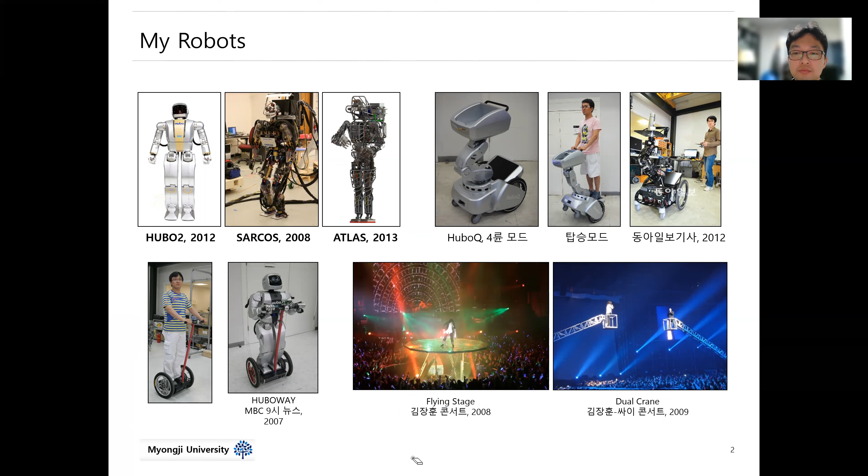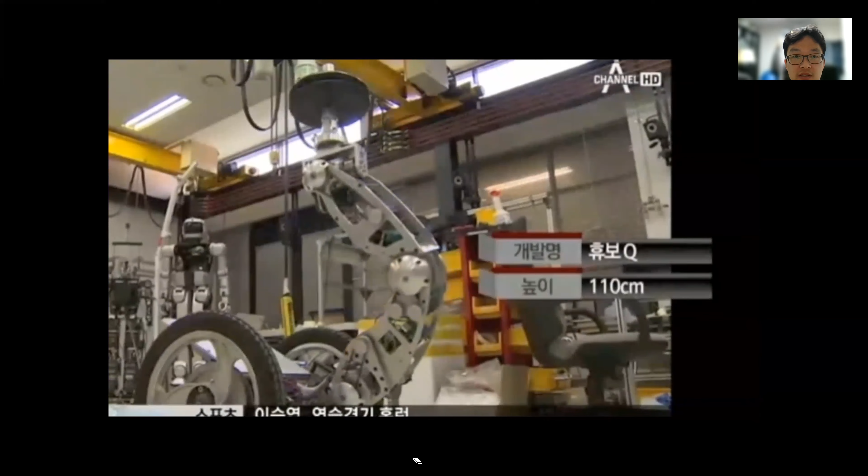This one is from a TV news segment, where my robot was shown. As you can see, it has high speed ability and can deliver very sophisticated objects. The middle manipulator controls to balance the object at the top position.

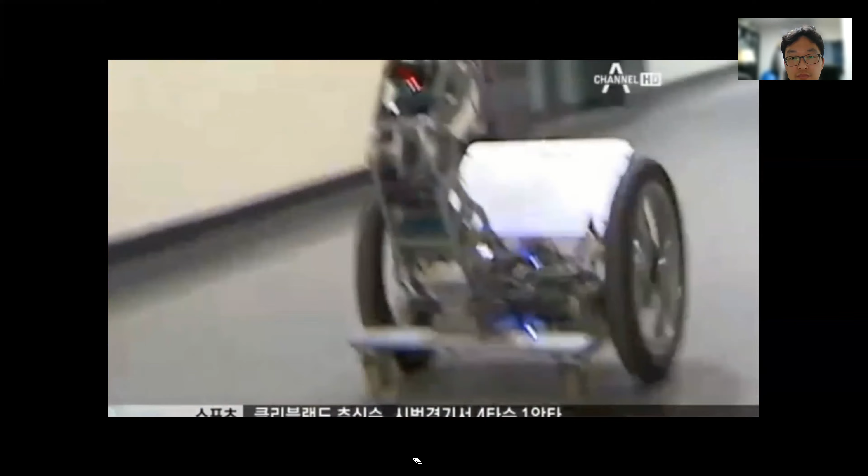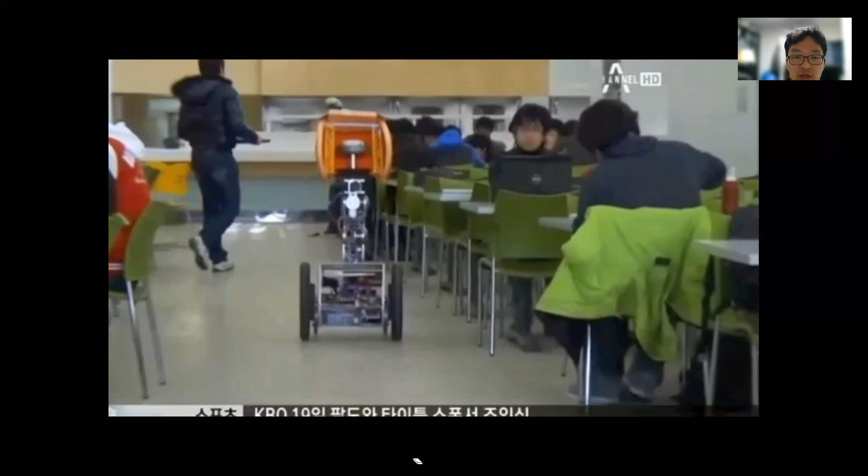This is myself about 10 years ago. This robot is transformable, so it can move in 4-wheel mode, and also transform into 2-wheel mode, and balance itself.

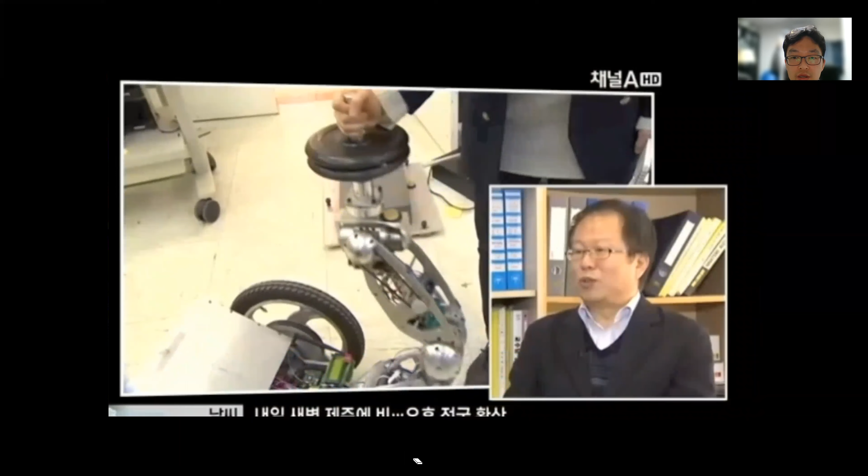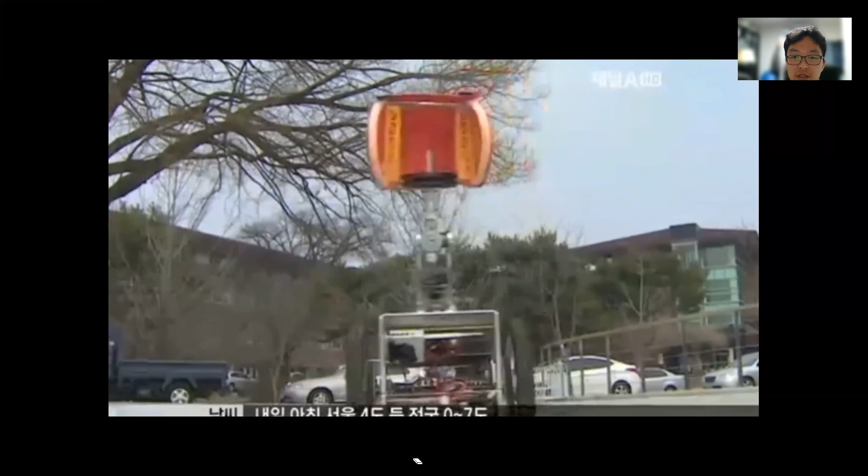He is my advisor, Professor Jun-Ho Oh. Now he is retired, but he created his own company, Rainbow Robotics, which he manages.

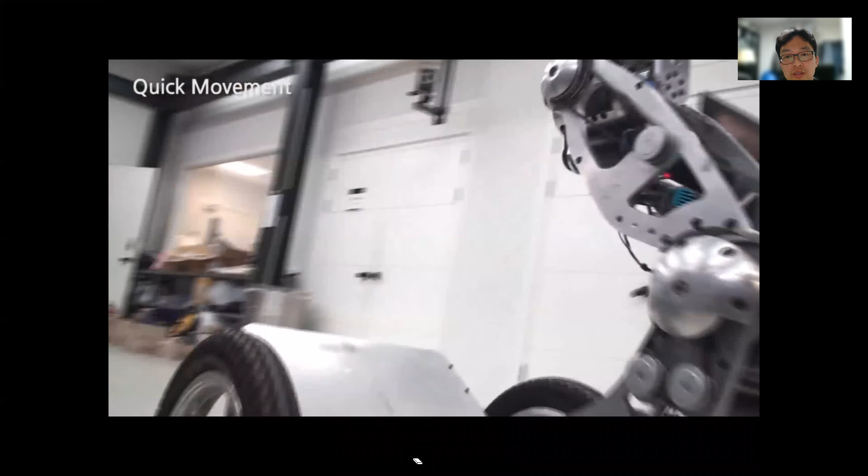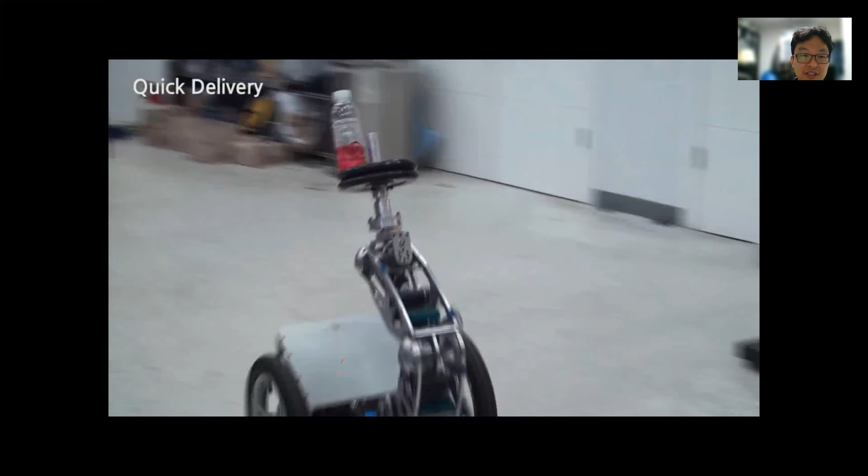As you can see in this video, it has very high speed—you can see the skid marks on the ground, made by my robot, so it is very dirty. The manipulator is very smooth and compliant.

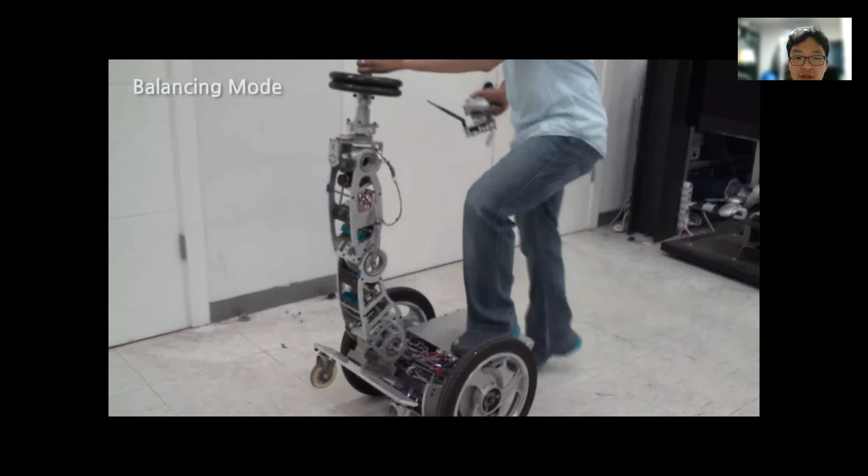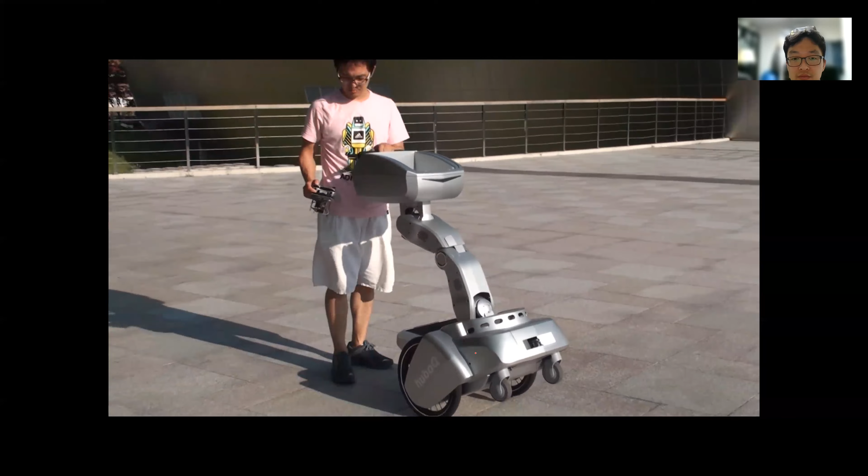This is the second version with newer hardware. Finally, when I graduated school, I made this cased version of Hubo Q. The name of this robot is Hubo Q.

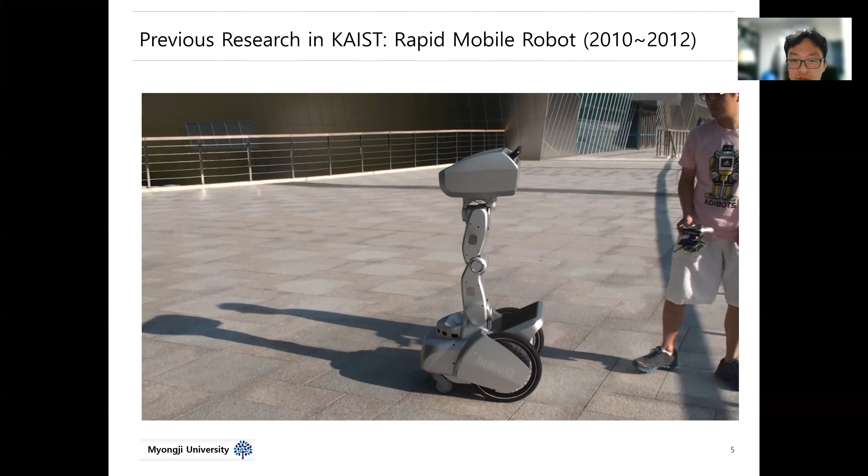I made three Hubo Q robots, and two of them are in my lab now at Myongji University. I brought the robots back from the Hubo lab for future work. I'm still studying this robot, making it deliver food—that is one of my research topics.

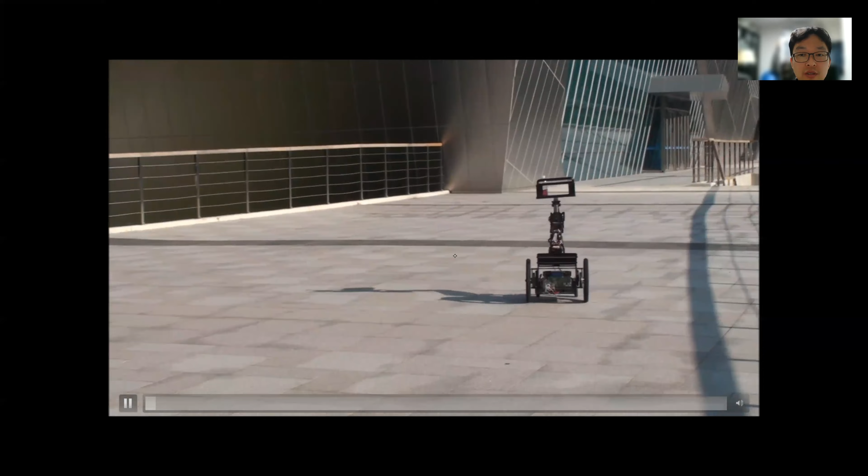This video shows two Hubo Q robots working together. When it goes along a circular path, it should move the upper part to maintain the balance of the object. My research goal was to maintain the object without it falling down.

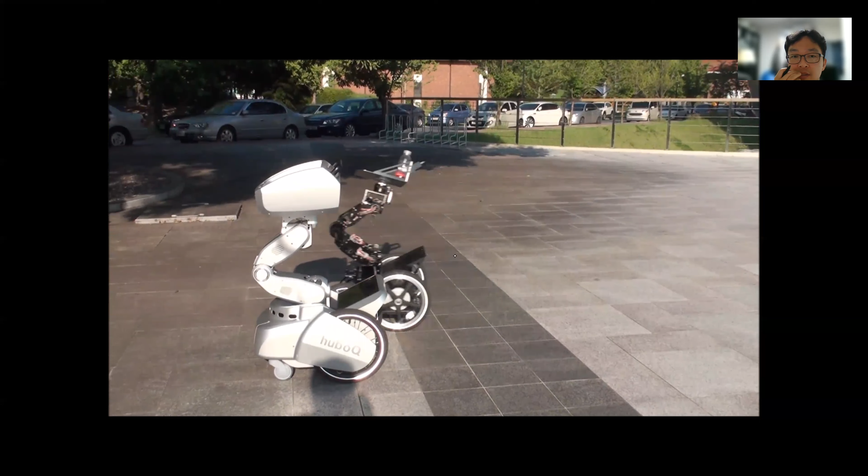When I was in the Hubo lab, that was 10 years ago. At that time, there wasn't much open source code or open source hardware, so all this hardware was developed in our lab, and this was a very important property of our lab. We did not share this, and only within our lab did we share our work.

At the time, there was no open source environment. It was actually a closed system. All the intellectual property was secured, and we were not willing to share it. But maybe with the advance of smartphones, the sharing culture became very popular, and in the computer science area, people shared their source code very often. The open source phenomenon happened in computer science. Nowadays it is very common and easy to find open source CAD, open source software and code, and open source hardware design.

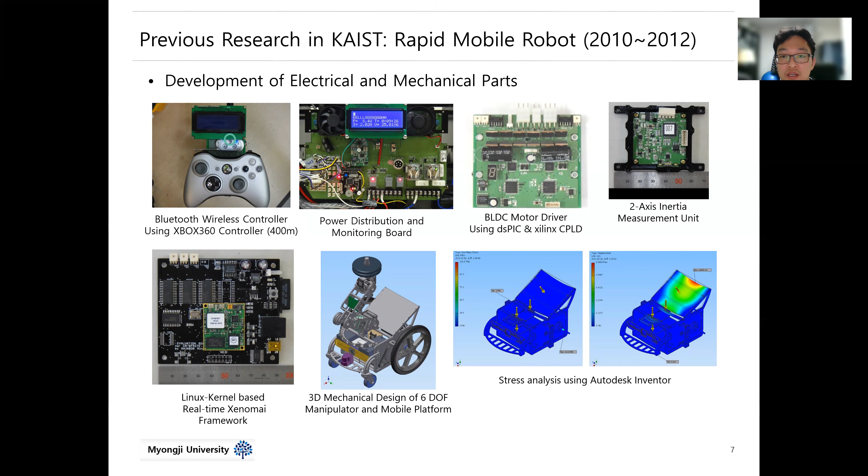So I searched very much about what we should use for motor control, what motor we should use, where I could build this kind of robot, and what kind of software to use. During the process, I figured out that this kind of lab-based property was already old-fashioned. After 2016, when I searched the open source community, I figured out this kind of technology was already outdated, and many open source hardware and software were already advanced and very useful.

So I started using open source hardware and software. Using that, I participated in making a robot and also a last mile mobility device. This robot was the first product when I was at Naver Labs, so it is a very meaningful robot.

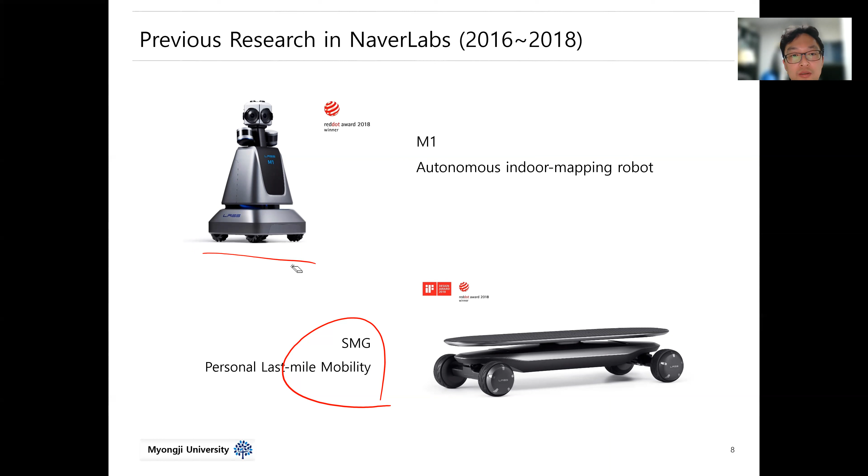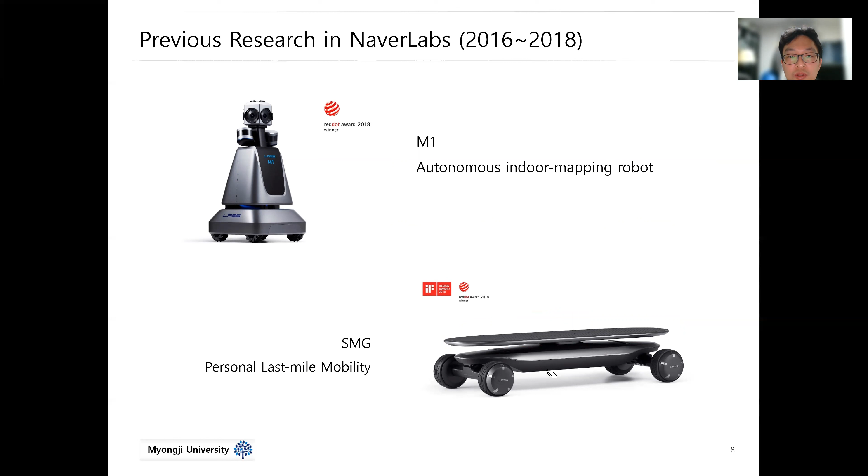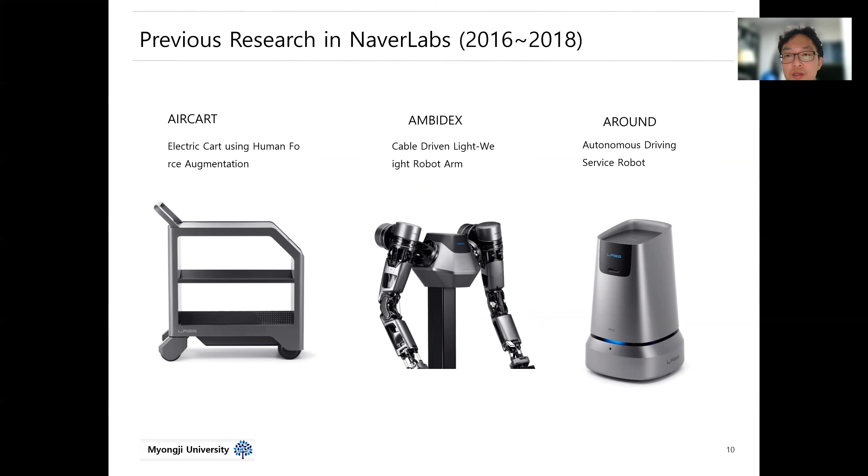When we made the robot, we made the M1 platform - I worked on that - and I made the personal last mile mobility named SMG, Sports Mobility. It has four wheel driving and a tilting platform, so with this tilting we can balance ourselves. This uses a computed torque method based mechanism for control. We also made the AMBIDEX, a lightweighted robot arm, and this is a power assistant cart.

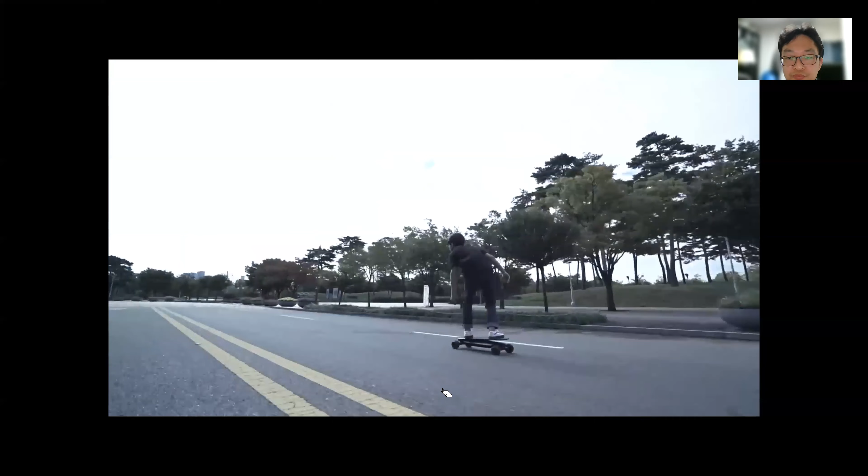As you can see, this guy is me. When we were preparing this video, we found a beautiful girl, a very famous beautiful girl, to ride this kind of skateboard.

She was one of the YouTubers, but the traditional four-wheel skateboard is not motorized - that's a passive skateboard, very different from the active type electric skateboard. She didn't ride it well at first and kept falling off the platform, so it was very hard to take a video. So that actor was myself, and that hardware was at our previous company - I don't know if it's still there.

When I quit Naver Labs, it was still there. It's been past 2 years now. I don't know whether this robot is still there or not.

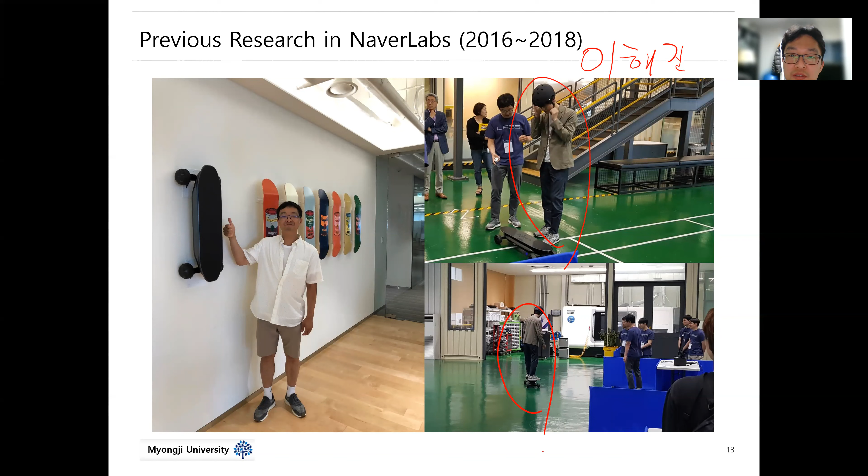Inside of the SMG is something like this. This is the battery pack - one pack is here and the other part is here. This battery pack is also self-made. This is the motor controller, motor controller, motor controller, and the battery management system. So all the things are customized.

It was very funny, very fun to develop this kind of robot.

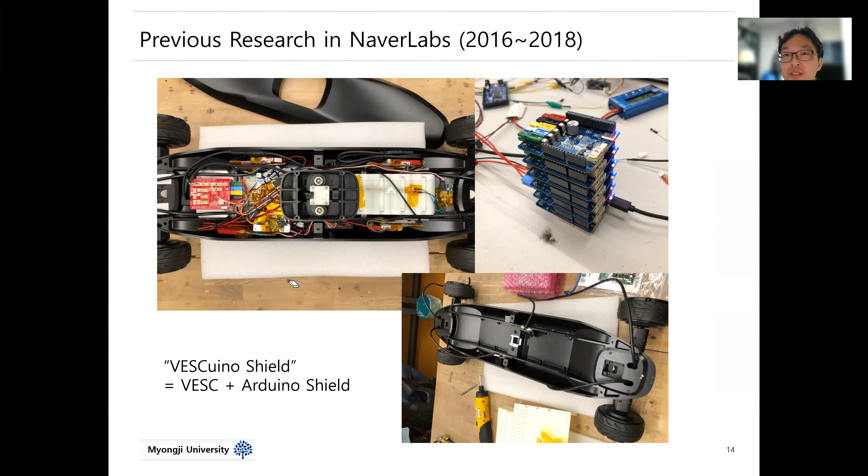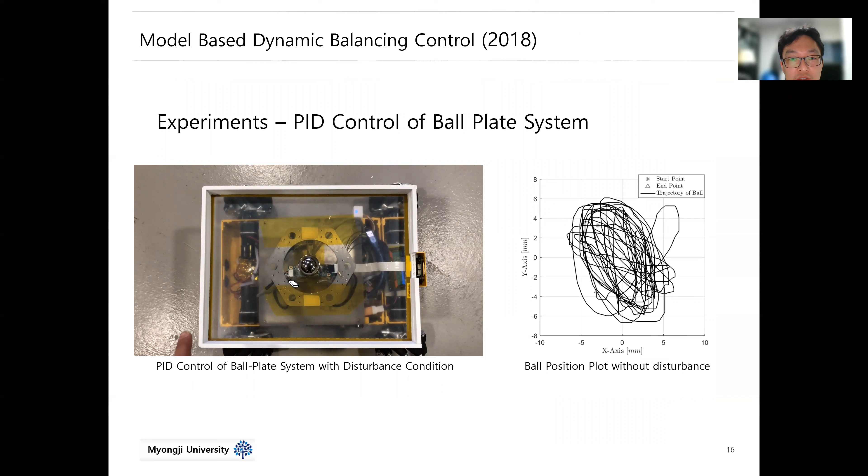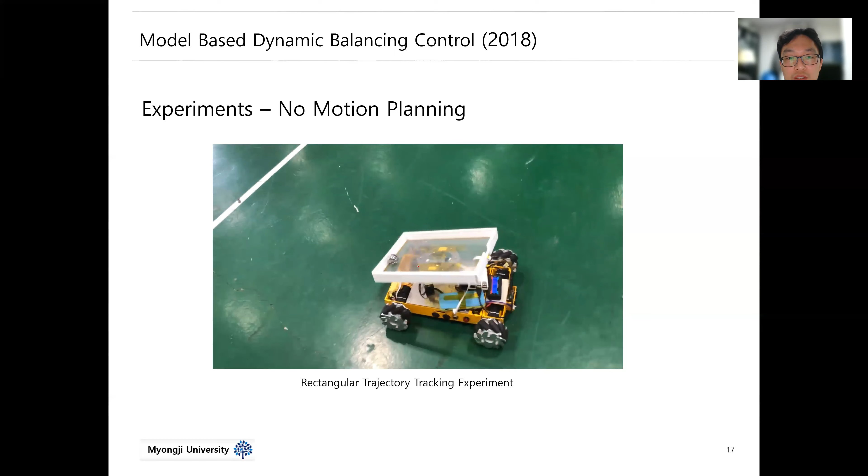And also this kind of robot, that robot was trying to make some autonomous system. Actually, this one is a steel ball, and the steel ball is moving on the ground. But if the stage is not controlled well, the steel ball cannot maintain its position. So this example has no motion planning.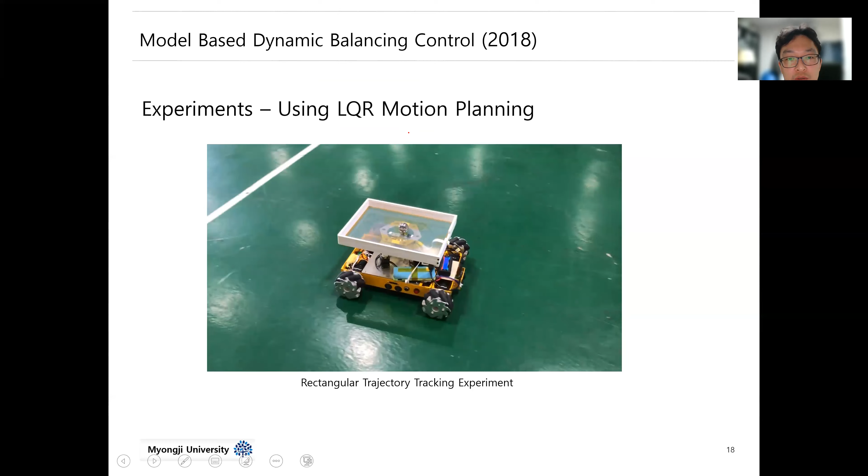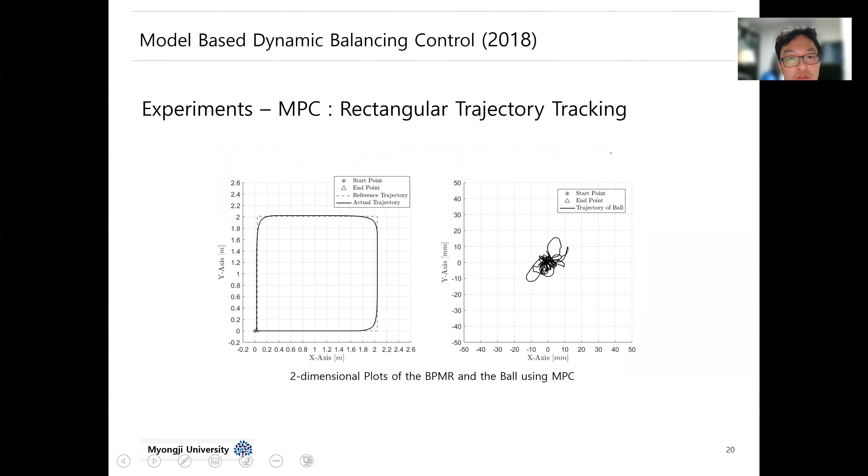But if we use LQR based motion planning, we can stabilize it a little bit more, but it is still having some instability. But if we add MPC based motion control, it is very well stabilized.

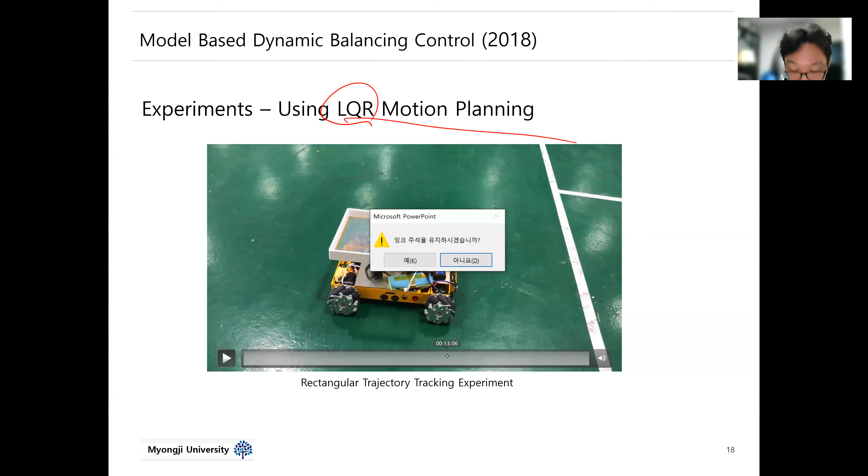There is no MPC control here. I don't know why, but you can find the video on the internet, maybe. This is my lab YouTube. Yeah, this one: PID, LQR, and this is MPC based motion control.

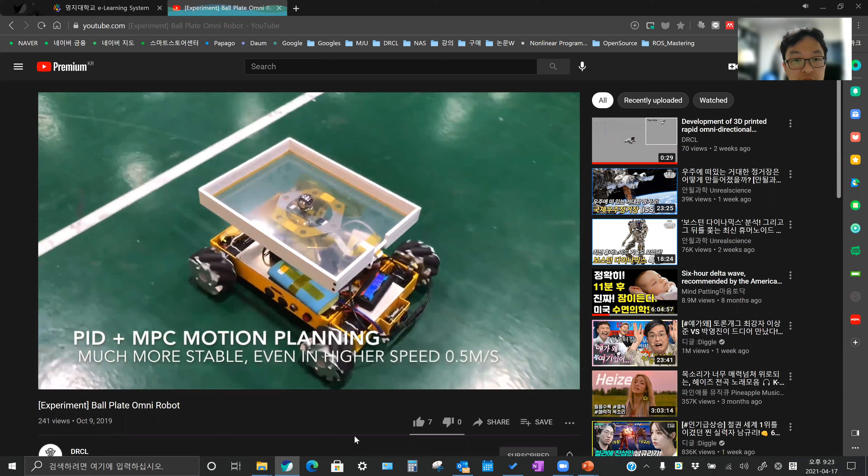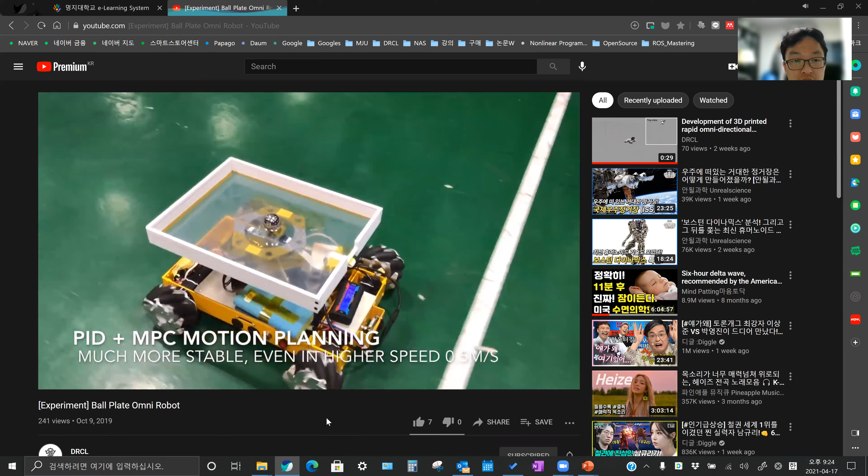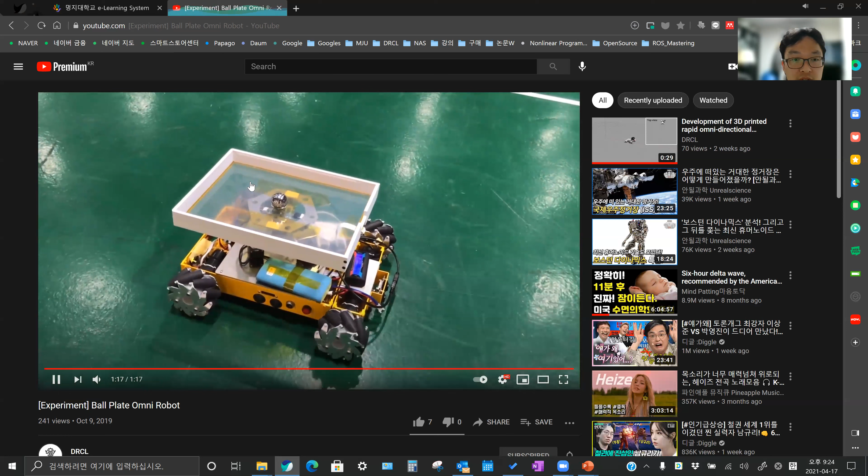In higher speed, the steel ball is very well maintained. So on the moving platform, this object should be stabilized with very active control. This kind of thing is done in our lab.

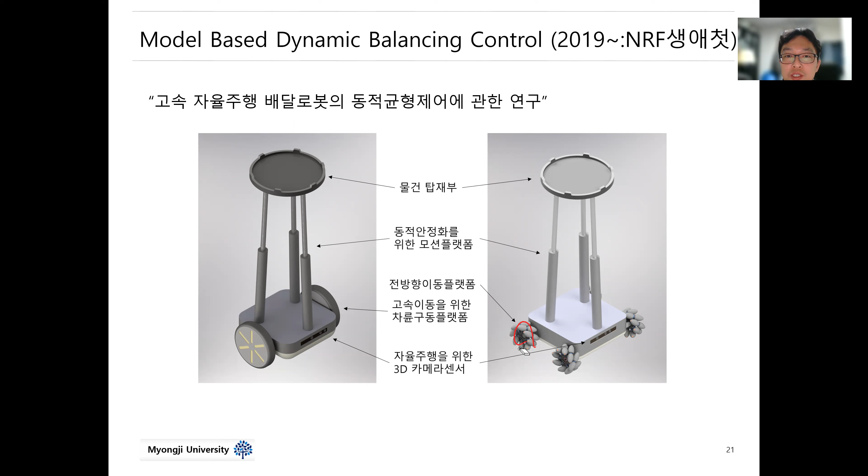Actually, the motor controller is the most basic component on the robot. If you use an electric motor to make some actuator on the robot, the motor controller board is one of the very important things, because depending on the motor controller, the upper part components change. If you're using a step motor or a DC motor, depending on the motor type, the robot actuation is different. Also, if you're using a BLDC motor, you should change your motor driver for the BLDC.

Depending on the motor controller unit, you should check the communication type and control bandwidth, and also what kind of PC you will use. All these things depend on the motor controller, so selection of the motor controller is very important.

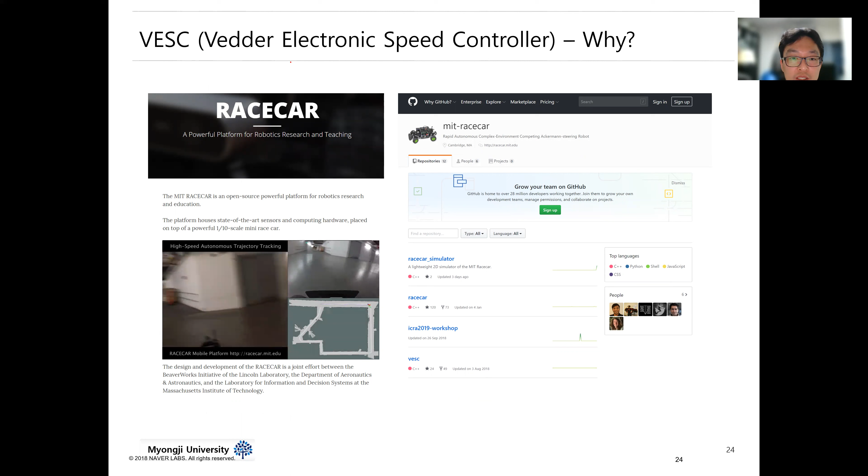So I used the VESC. The VESC is an open source motor controller. Actually, some Swedish guy made it - Benjamin Vedder - he made the VESC, and it is one of the very famous open source motor controllers. It is also used on the MIT race car. Actually, this VESC is specialized for the wheel-based system.

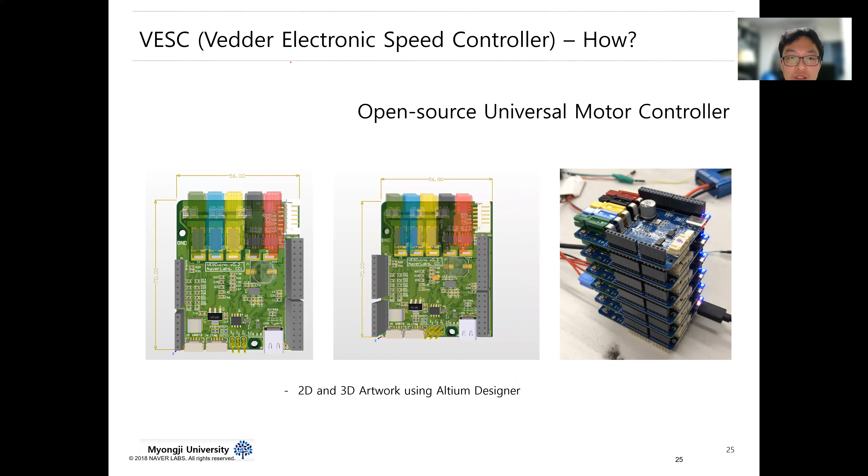But in my case, I want to use this VESC on a robotics system. So I designed my own PCB and made a stackable motor controller shield. If you stack it on the Arduino, you can use it as the main controller, and by using Arduino, you can command the motor control.

In my VESC version, we can use a very precise position control scheme, and also we can use ROS (Robot Operating System) based control. The main communication method is USB, and you can also use CAN to control the robot.

So this kind of thing is about the controller, but I will show you some more detailed information. Actually, this robot controller is being sold on the internet. So if you choose the Naver Smart Store here, you can buy the motor controller unit.

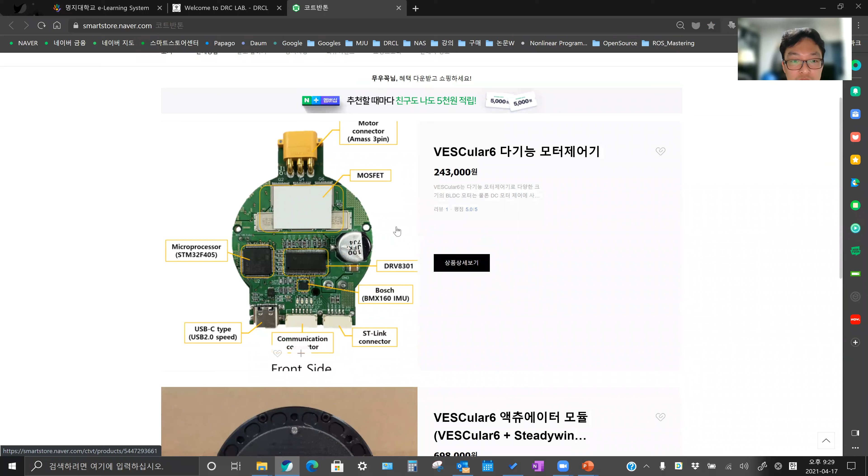This one is just a single motor controller, and this one is a motor controller with motor actuator - this is the motor reduction gear with motor controller. If you buy this one, you can solve the actuation system. If you just design the link and connect the joint with the link, you can make your own kind of robot.

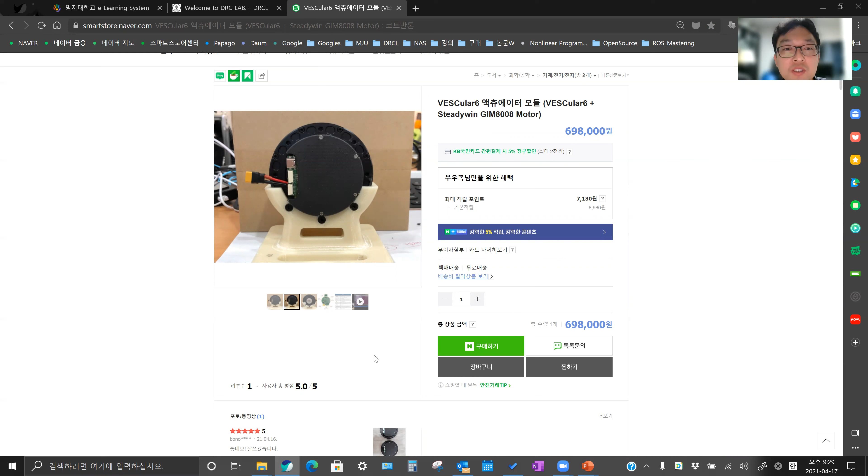You can make your own robot, like an MIT Mini Cheetah-like robot. This robot is actually very good and very powerful. This is my motor controller - this is the video of a 3D printed actuator. The motor controller is here on the back side, there is a motor drum motor here, and here there is a 3D printed gear, and there is the link. So if you want to build some kind of robot, you should consider what kind of actuator you use, and this one can be one of the candidates.

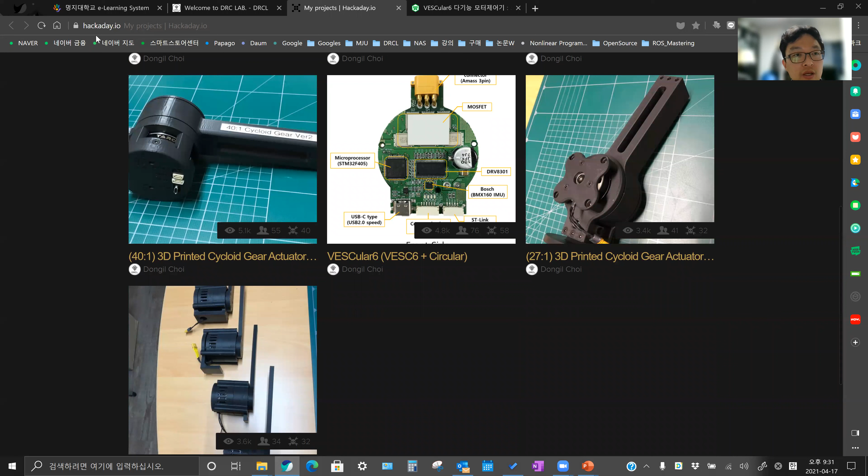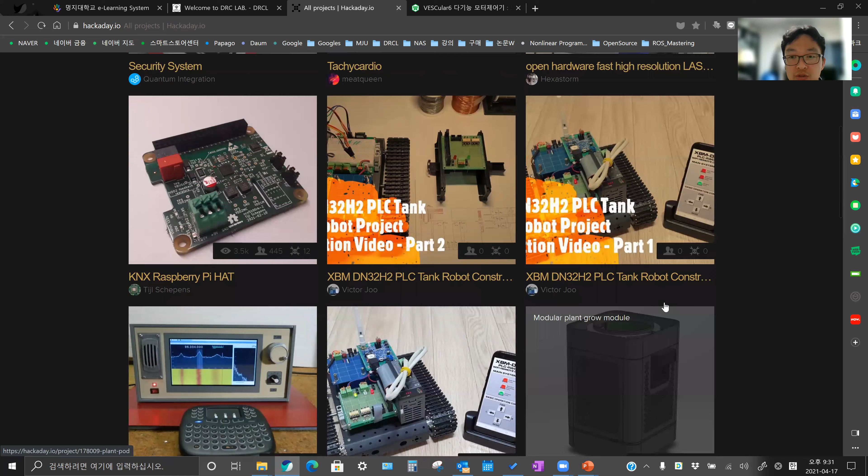About our project, I uploaded our content on hackaday.io. This site is one of the famous sites to share information about hardware development. On this site, there are many projects, especially hardware projects and also software projects. So someone made this kind of thing and uploaded what he did. You can check this site for studying, or if you want to make your own robot, you can check what kind of things are already made, or how other people made their robot.

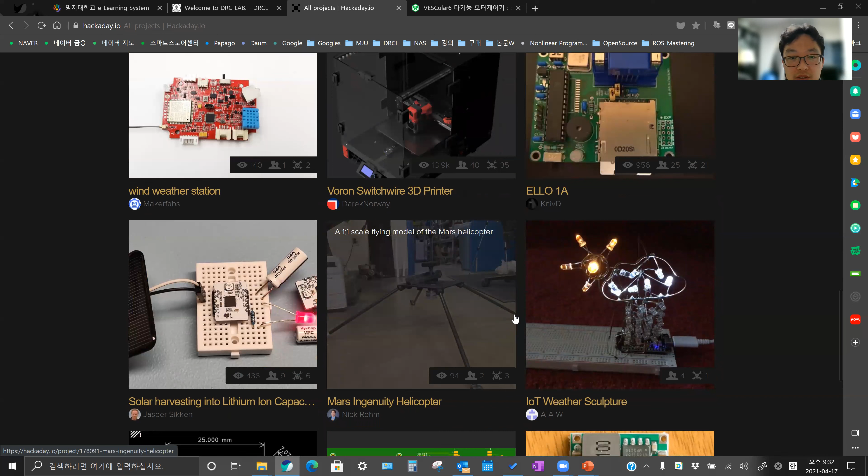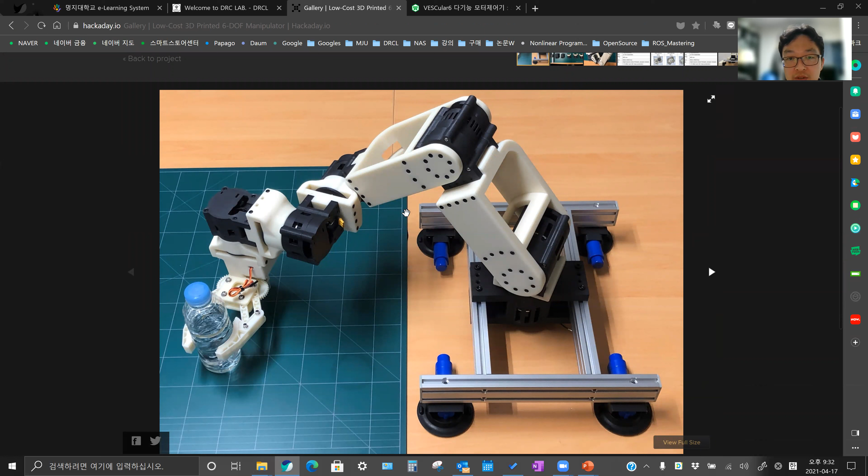So these are the kinds of things you can find on this site. In my case, I uploaded my planetary gear actuator, the motor controller unit, and the cycloid gear-based actuator. We also made a 6 degree of freedom manipulator using our own 3D printed actuator. I'm testing this one, and maybe this year I will show the result of the actuation.

So what is open source? I introduced hackaday.io. If you want to find some software code, you can check GitHub. You may already know GitHub because I uploaded my modern robotics simulation library there.

For hardware, you can check hackaday.io and hackster.io. You might also know Thingiverse, which is one of the famous 3D printing open source libraries. And also GrabCAD, one of the famous CAD library sharing sites.

And for ROS, the robot operating system, you can check The Construct Sim. It's one of the important, famous ROS sites. So if you want to learn ROS, this is one solution. You might already know that in China they sell the MIT mini cheetah motor.

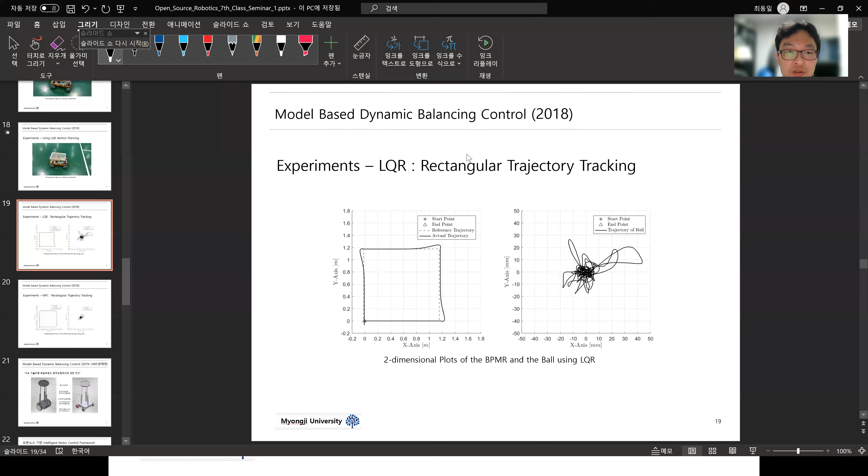I think that is the power of open source. One of the bright sides of open source is you can easily make this kind of robot. But the dark side of open source is this kind of robot becomes too common. The technology barrier becomes very low because of this kind of sharing of technology. So this is one of the actuators, and it's very good and very cheap.

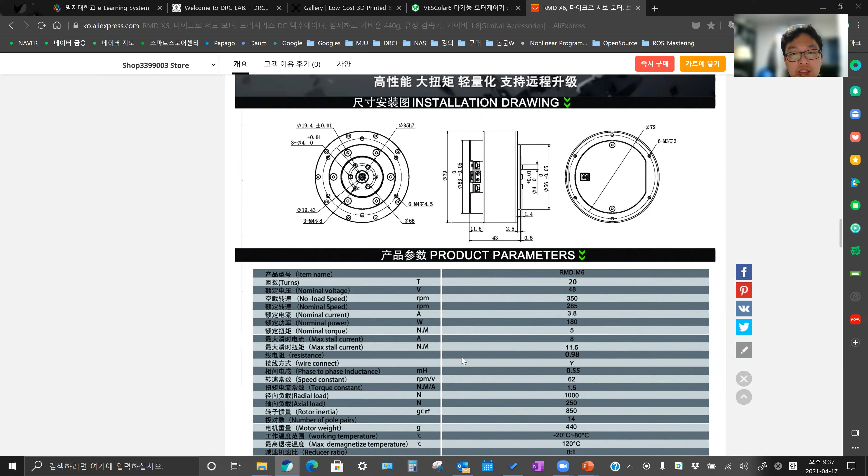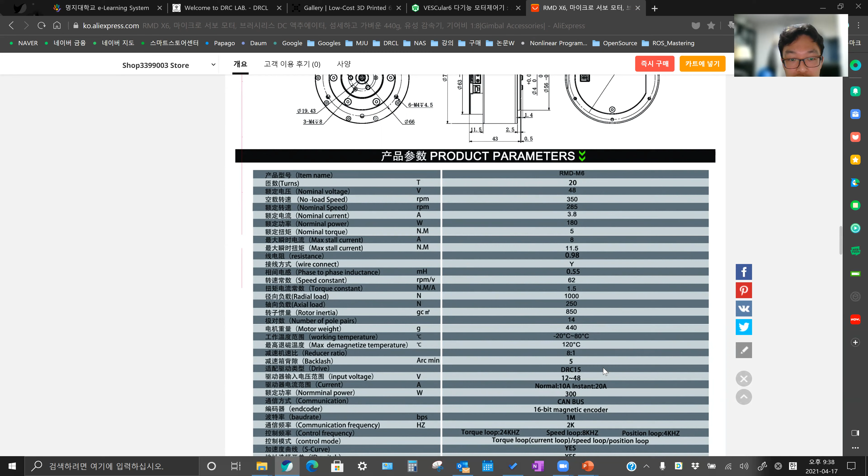Actually these days, a small gear ratio is popular for motors. In the past we usually used a very high gear ratio for precise control, but these days we usually focus on torque control. For exact torque control, a lower gear ratio is better. So this one uses a torque motor, and it seems very good.

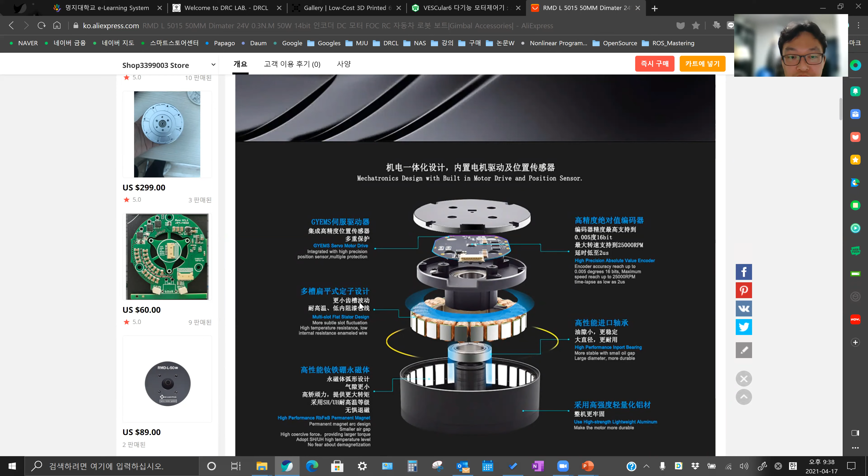Maybe we should test this motor. What is this? It seems like this one is also a motor, a servo motor. It seems quite good.

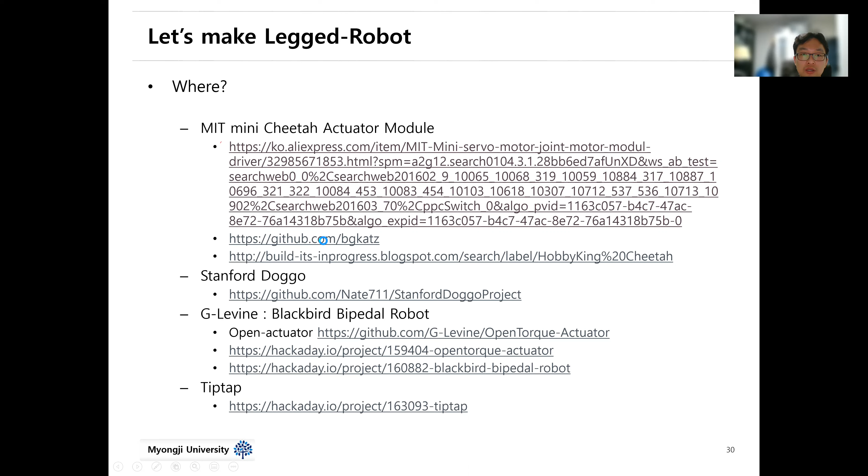Actually the motor controller space is very open, because there are many open source motor controllers. The MIT Mini Cheetah project also opened their firmware for the motor controller. Because this is shared on the internet, companies in China can make the motor controller very easily. This is also a good solution, my own solution, for a good motor controller.

Okay, so I want to announce one license issue. When you use open source, there are a few of the most famous open source license types. One of them is GPL3, and the other is MIT or BSD license. So if you see these kinds of things, you should figure out what they mean.